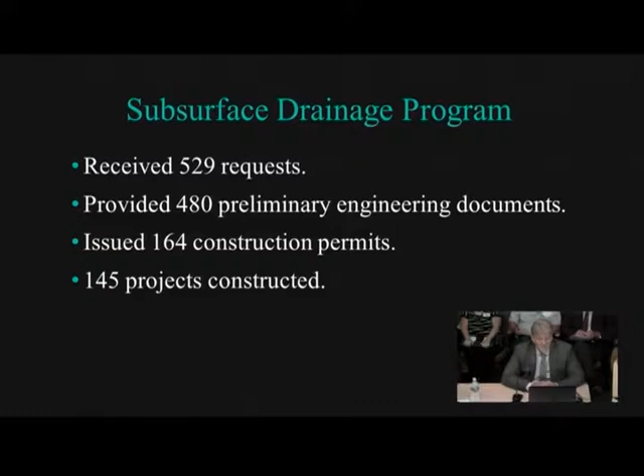All right, our subsurface drainage program so far has received 529 requests. Mr. Don Edwards has provided 480 preliminary engineering documents. At this point, we've issued 164 construction permits, and out of those, 145 have been completed.

Our Montz master drainage plan has been completed. We've identified 8 major projects to do in the Montz area. The biggest one is working with KCS Railroad to initiate new jack and bores at the Parish Line Canal. However, about 800 foot west is a 32-foot trestle, which we've identified, that has a very minimal amount of water going through it. We've had an initial meeting with St. John.

Conceptually we agree that since we're moving a significant amount of St. John water, Natalie is very much open to an agreement with us to allow us to use that trestle. This will be a great help to us because our biggest issue is getting water across the KCS.

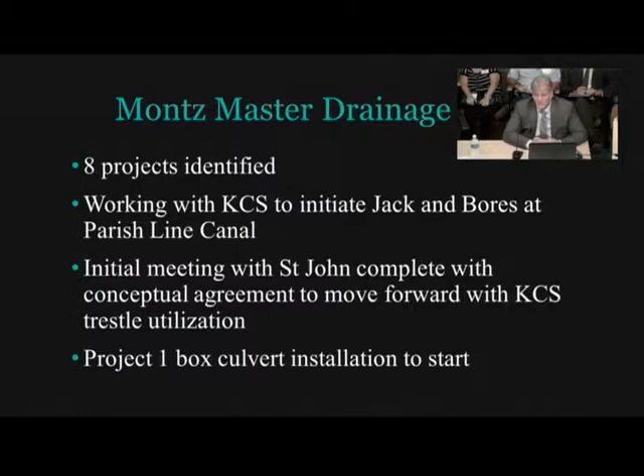We're getting ready to start our first project, which is the installation of 5x10 box culverts at Airline Highway and Evangeline Road. A lot of the water that's been sheet flowing across Evangeline Road is due to St. John water filling up those ponds. We feel that the 5x10 box culverts will prevent the sheet flow of that water, get it quicker across Evangeline Road into the pump station.

And there it is, the 5x10 box culverts. The in-house engineering is complete. Scheduled installation is within 60 days. The critical path for this was ordering the culverts, which came in last week. So since we have those, we will be scheduling that installation.

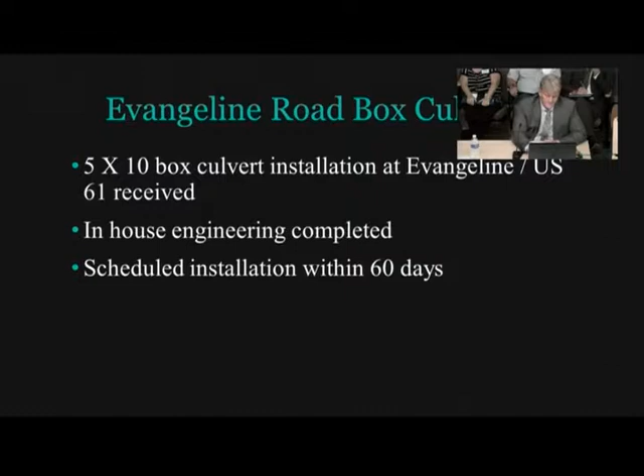The Montz Levee bike path, August 8th, we did an initial inquiry to identify remobilization. Lee, Danny Abear, and the contractor got together. The 226 days of the river above its 11-foot level is an unprecedented work stoppage. The monthly project reports had to continue, as there is no caveat for not doing a monthly report.

So Lee has been doing monthly reports for this bike path, although there has been no activity. The contractor is asking for 60 days to remobilize. His biggest issue, or critical path forward right now, is construction material. He has to check the availability and also the pricing on it, because it's been almost a year since we've been working on this project. He has agreed to provide us with a forward path within 30 days.

Norco drainage study, the preliminary design work has been completed. Engineering design work is awaiting council approval, and you will see that is on your agenda for tonight.

Engineers Canal Pump Station improvements, contractor scheduled to mobilize in mid-September. The critical path was the delivery of the new pump. Prep work that we decided to do in-house for the generator pad and some of the concrete work around the pump station has already been completed by us. We also have the generator on order, waiting for the construction to start.

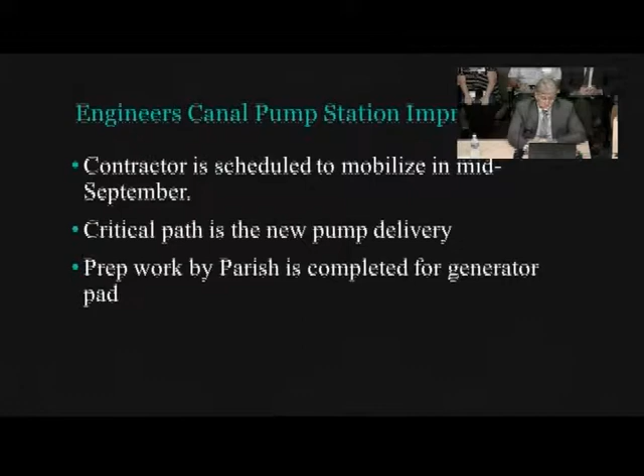Engineers Canal Bank Stabilization, the preliminary design was submitted and engineering feedback is underway. The design work is ongoing, and Phase 1 will approximately be bid in first quarter of 2020.

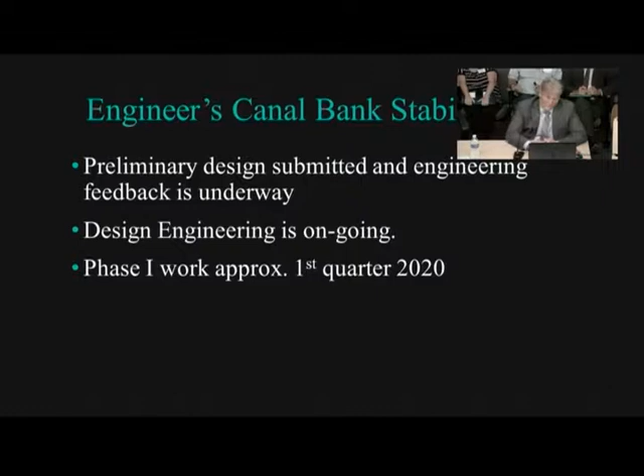Fifth Street drainage improvements, the capital outlay funding was approved. We have approximately $450,000 of the $750,000 needed for this project. The remaining part has been submitted for grant application, but we've already begun the engineering work.

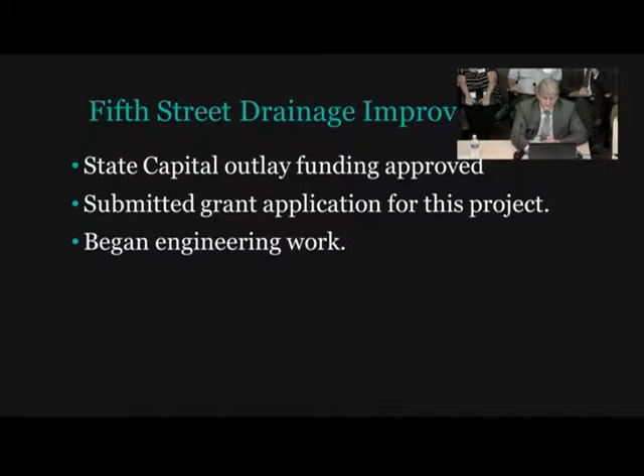Dunleith Canal Stabilization 7, this project is completed with the exception of the final paperwork and payout. The Phase 8 bid is opening tomorrow. We will be scheduling a construction schedule for start.

The Linwood crossing was removed due to drainage concerns by some of the residents. They felt that was an impedance to drainage in the Dunleith Canal. We had planned on removing it after Phase 8, but we just decided to go ahead and remove it, and that was done.

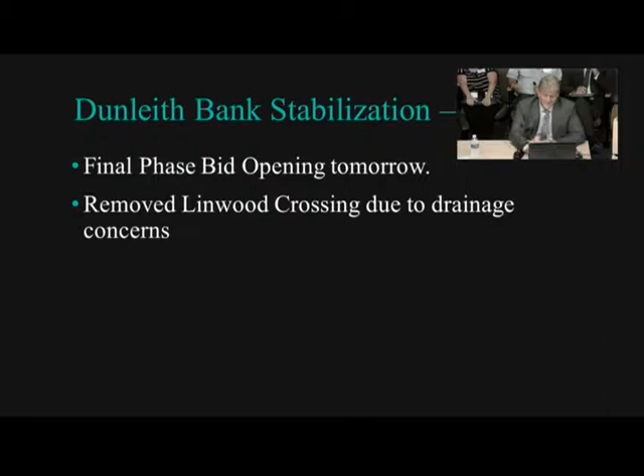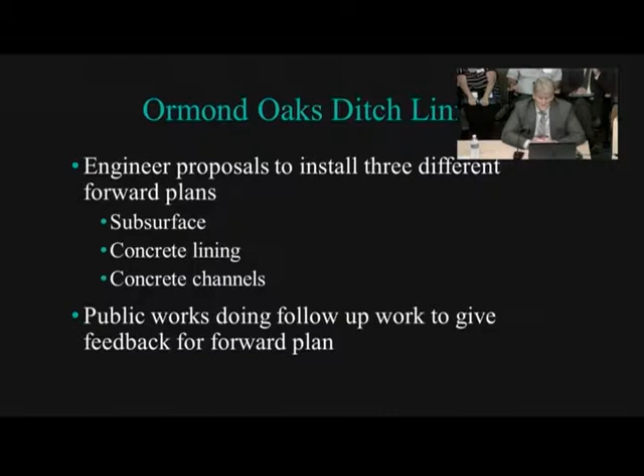Ormond Oaks ditch lining. We had the engineer propose three different plans. One is subsurface, which is being recommended by the engineer. We're also looking at concrete lining or concrete channels. Due to the location and proximity close to the houses, we're trying to understand which one would be most economical and at the same time most feasible. Public Works is doing a follow-up to give feedback for the forward plan.

Destreha number 1 pump station discharge piping. The engineer design has been completed. We're awaiting a proposal from BLD due to the change in the public bid limitations. We believe the installation to be less than $250,000, our new limit for public bid laws, thanks to the Louisiana legislation and Ms. Mary Clulee. Gary Smith led that initiative, and St. Charles Parish was given a $250,000 limit raised from the $150,000 limit. So it's possible we could actually do this work, contracting through our contract with BLD, and keep it below $250,000.

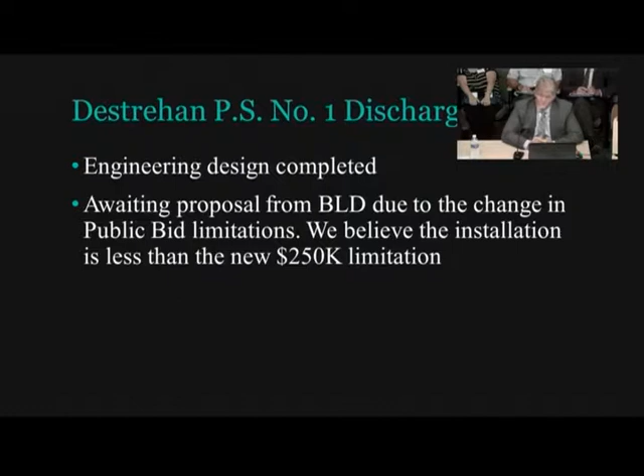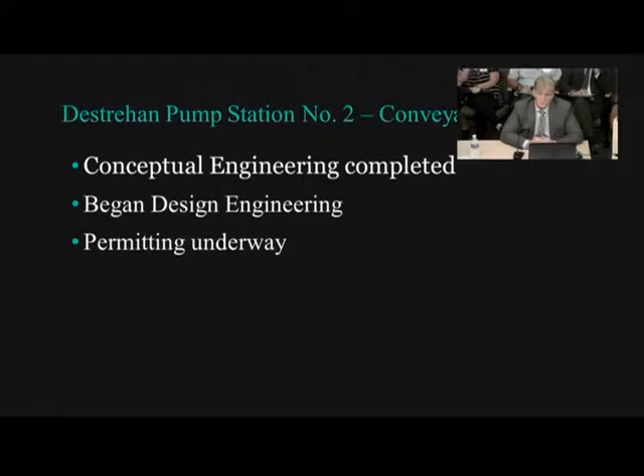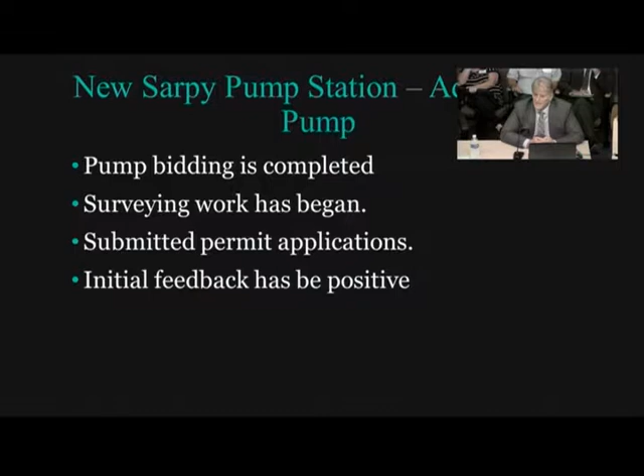New Sarpy Pump Station additional pump. The pump has already been bid and completed. Survey work has begun, and Evans Graves has already submitted the permit applications. Initial feedback from the Corps of Engineers and DNR is that all is good.

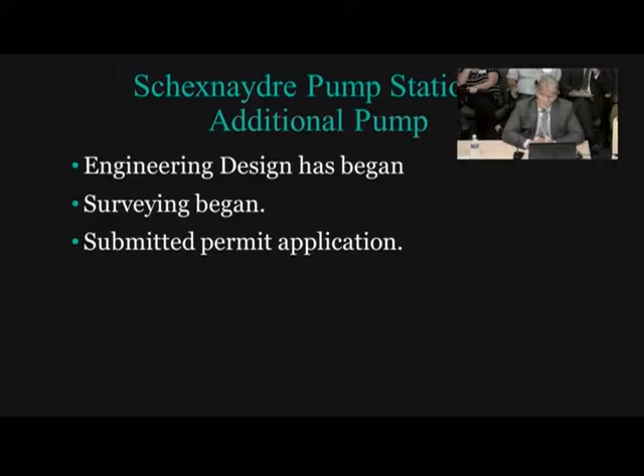Schexnaydre Pump Station additional pump engineering design has begun. There's a little bit more work here due to the possible need to increase the sump. Surveying has begun, and Evans Graves has also submitted the application to Corps of Engineers for this pump increase also.

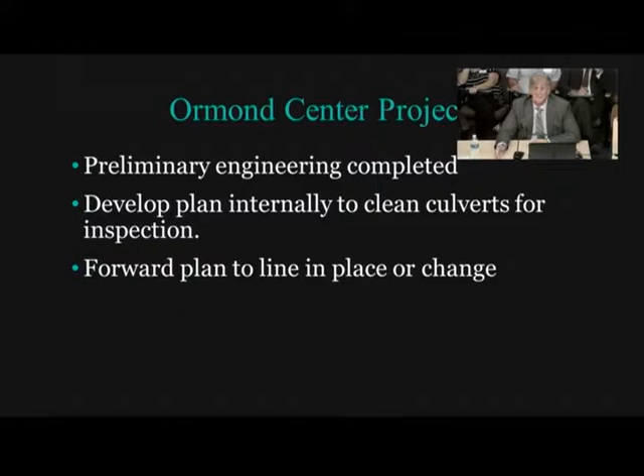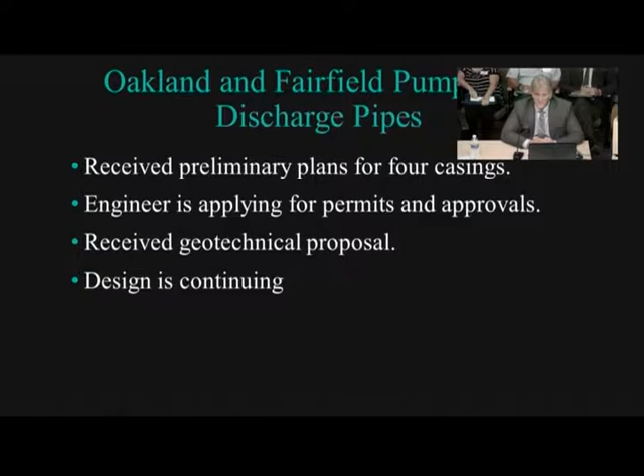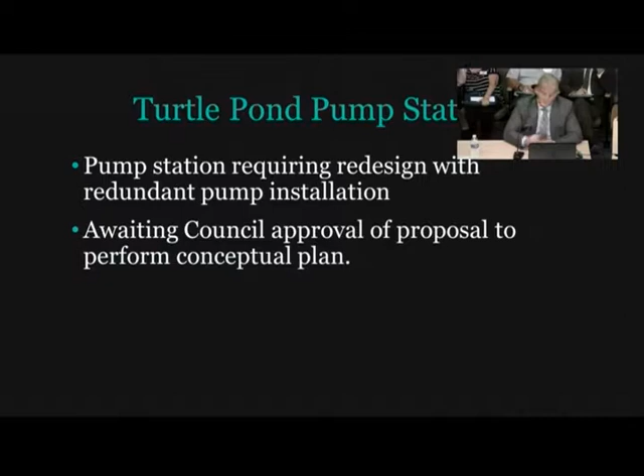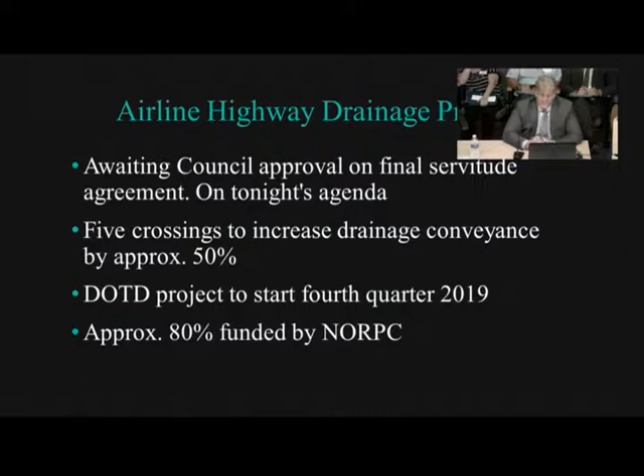AMA pump station design: the preliminary design is completed. Design work, I think, is at 90% right now. We're awaiting feedback from Lee so that we can get final design and probably in the 1st quarter of next year go to bid on this pump station also.

The AMA Perimeter Canal System: as you know, AMA is enclosed by the Hurricane Protection Levee. We only have one outlet, and that's the Sellers Canal gate. So when that gate is closed, the internal drainage basically doesn't have anywhere to go except the reservoir area, which is the swamp area just north of Highway 90, south of the railroad track.

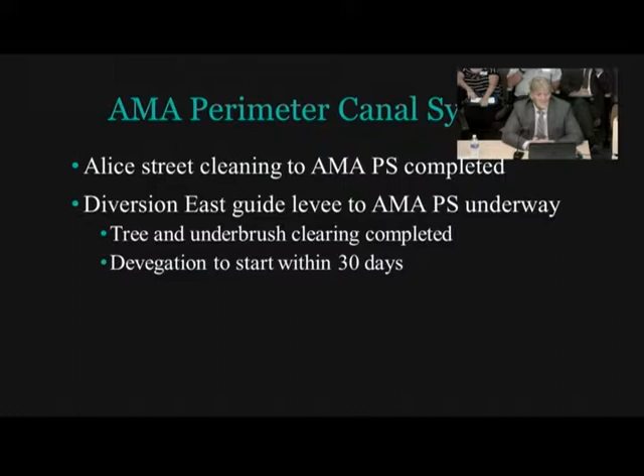Due to that, in the event of rainfall, we realized there was nowhere for the water to go, so we got 2 permits from the Corps of Engineers: one to clean the Alice Street ditch, which goes from River Road all the way to the AMA pump station. We're now cleaning the BNSF ditch from the diversion all the way to the AMA pump station. The trees and underbrush have been cleared, and within the next 30 days we'll be bringing excavators in to start the devegetation of that area.

West Bank enclosed levee system: due to the emergency incident of Hurricane Barry, the Paradis Canal was closed to 7.5 feet and is awaiting the Paradis gate structure, with approximate bidding sometime in October. This, along with the gaps on the pipelines, provided 7.5-foot protection for that entire area, tying it into the Sunset Drainage levee.

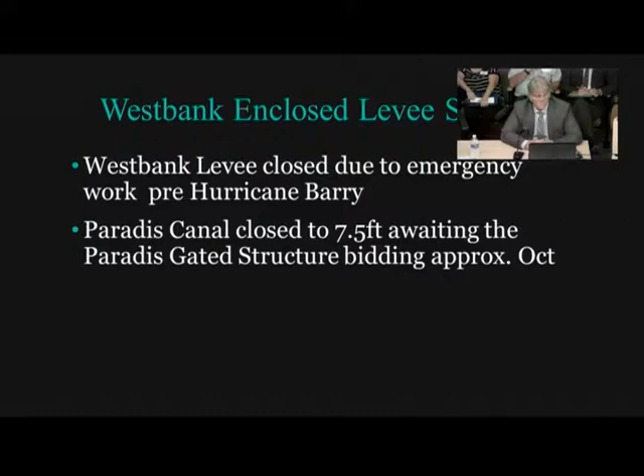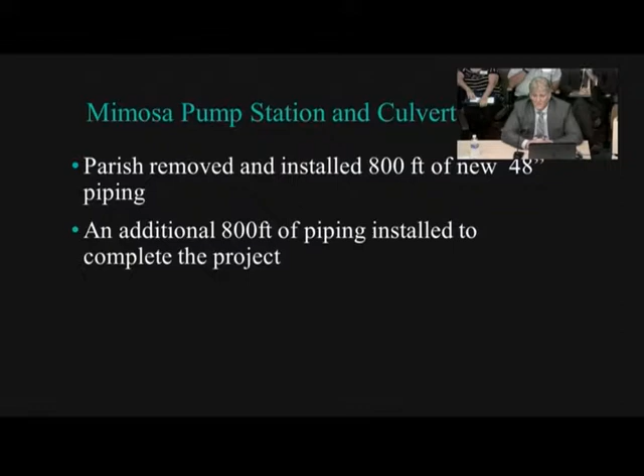Mimosa Pump Station and Culverts Project: the parish removed and installed 800 feet of 48-inch culverts that were found to be over-deflected. An additional 800 feet of piping was installed a few months later to complete that project all the way through the discharge side for the open ditch that was put there.

Highway 52, or as you may already know, the Paul Maillard Road Revitalization Project: we're waiting on the surveyor to finish Phase 1. Subsurface drainage is in final design for Phase 3 in conjunction with the Bayer Linear Park. Public Works will be installing that segment of subsurface drainage along Paul Maillard Road.

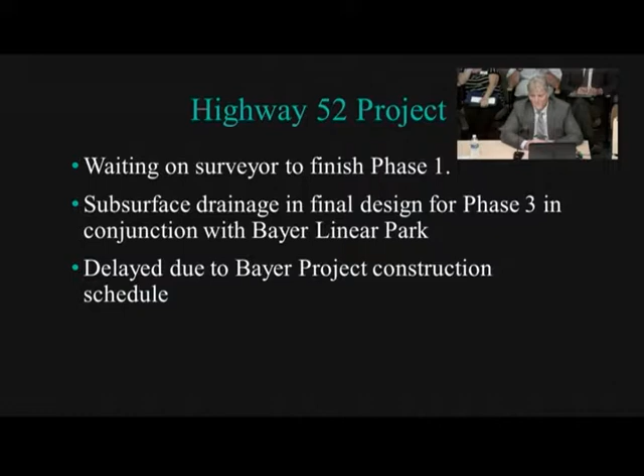It's delayed presently due to the Bayer project construction schedule continuing. It was set for the summer so that we would not interfere with the bus schedules and additional traffic during that time. It was not allowed to go forward due to the Bayer schedule, but we're scheduling it for possibly the near future, or at the very latest when school lets out in June of 2020.

Highway 90 sinkholes started construction today. We are considering a change order to include the additional sinkhole in front of Majoria's, which is actually both sides in front of First National Bank as well as on the Majoria's side. So we are looking at both of those sinkholes to see what that may entail, and due to the cost of re-engineering and rebidding, we may just consider a change order to include that.

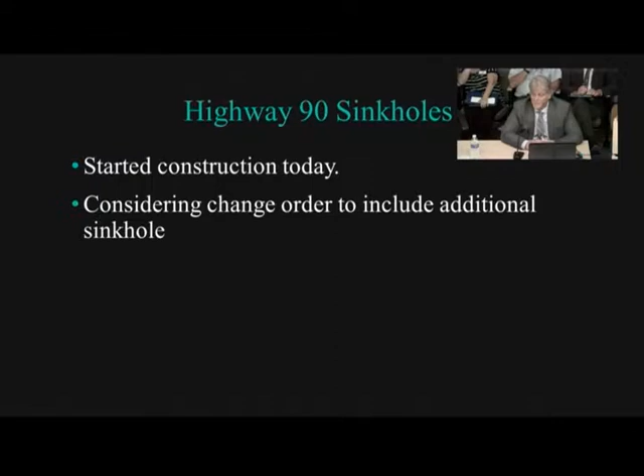The electrical building at the East Bank Public Works office, we received the 90% plans and we're awaiting the 90% specs. When we get that, we're planning to proceed as expeditiously as possible due to still needing a place to house our spare motors.

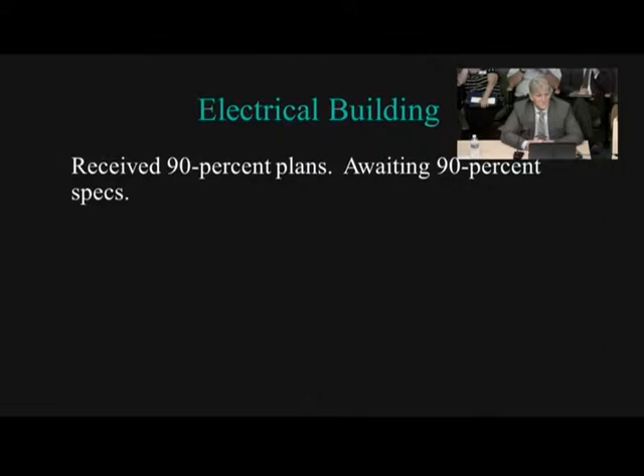The West Bank Yard building, the conceptual design was completed. A location has been identified, and presently we are getting feedback internally on what the layout of that building looks like.

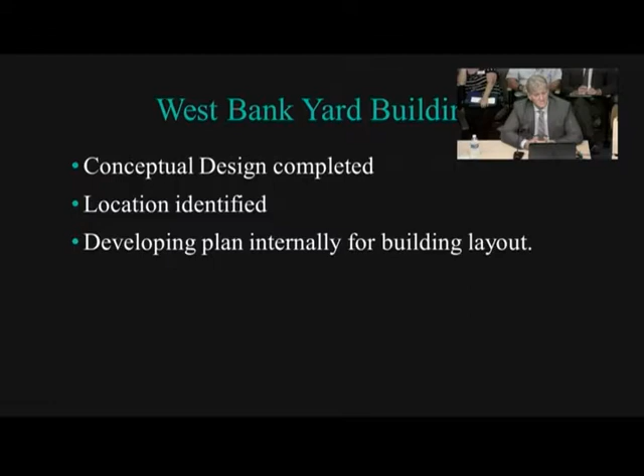Due to the significant issues we had during the Hurricane Barry event, we are looking at possibly having housing there to put our employees so that we could divide them between night shift and day shift and keep a tighter supervision on things that we were unaware of, I'll say that, that was happening, and make sure that constant communication is consistent and that it's not being modified as it leaves supervision down to the foreman level.

2019 road maintenance, construction has been bid and is scheduled to start within the next 60 days. The first road that'll be started is Evangeline Road. We will be completely resurfacing from KCS to CN railroad tracks.

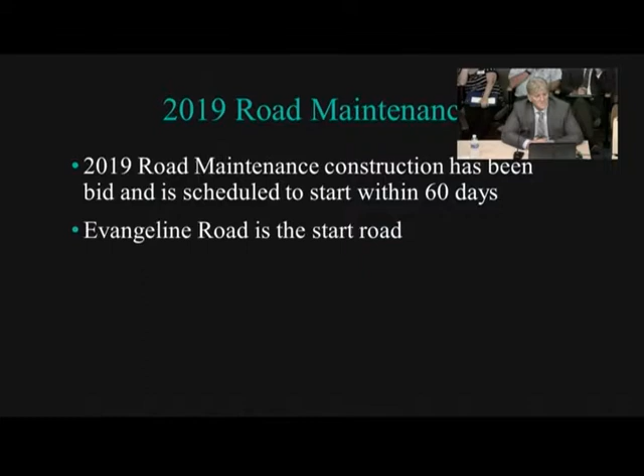Lakewood Boulevard rehab, preliminary design was completed. There's a significant base issue and foundation issue with this road. It's going to probably be a standalone project and a significant one at that.

The design was submitted to New Orleans Regional Planning for funding. The project cost is approximately $5.6 million. RPC has actually provided federal funding, and it looks like it's slated for 2022, and approximately $4.2 million of this project will be paid with federal funds through regional planning.

The dog park and road extension, conceptual design has been completed. Engineering is ongoing. We met with DOTD for a joint use agreement, and that has gone extremely well. Right now we're waiting on DOTD's comments or approvals. We also met with the developer at Exten for the additional servitude that we need to put in the road.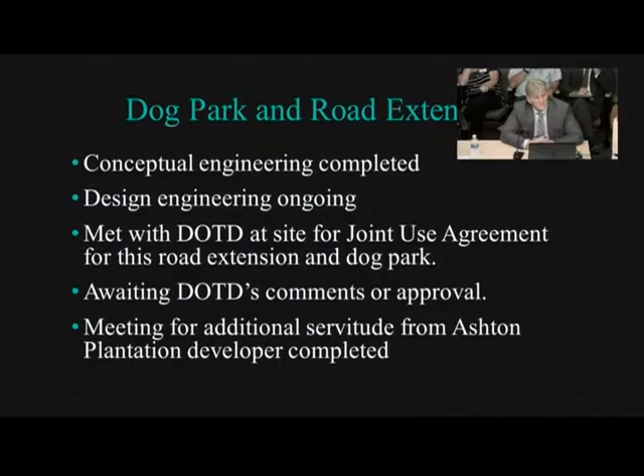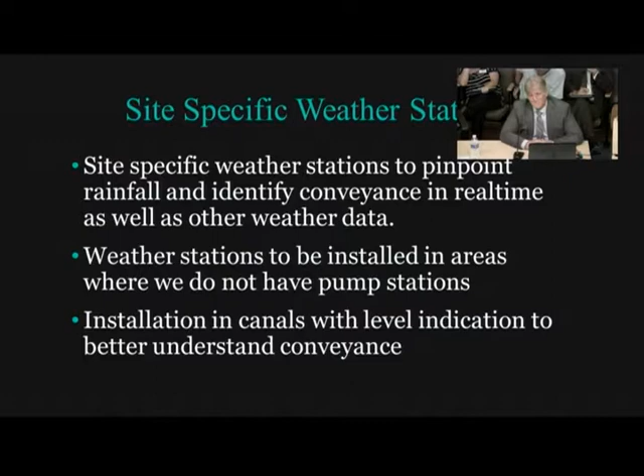Norco Montz Spillway Road. We're getting a lot of questions on this. We did an initial investigation, then we actually went out and walked the road where we could from both sides. Lisa Rang did an approximate estimation.

If we did all of the work in-house without engineering, without bidding, and without design work, it would cost us approximately $396,000. This is above our internal bid limitations because we're limited to $250,000. The additional costs and timing to engineer in place for public bid is probably going to push this close to $500,000.

Break the bid laws? You sound like the chairman. Yeah, I had that question asked to me at the state level. They said, well, if you have these projects, why don't you just break them up in phases? And I said, Mr. Chairman, you do realize that's against the law. So he kind of retracted it. But yeah, we can't do that.

So that's as quickly as I could to give you a rundown. We have a weekly meeting to track the progress of these projects every Monday morning at 8 o'clock. You're welcome to attend. But I felt we always take a rear view look at what we've done, and I felt the timing was right to look at what we have going forward instead of where we have been.